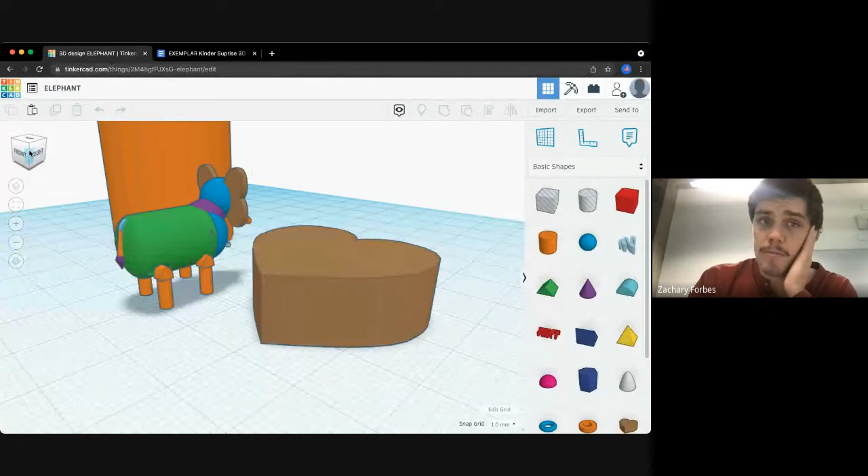Okay, so to get into Tinkercad, I think you guys should be able to get there pretty easily. So what I'm going to do today is start looking at how I might design something like this. This is super basic—well, actually maybe not so much, but everything in here is made from shapes I've found under basic shapes. So pretty much your imagination is your limit.

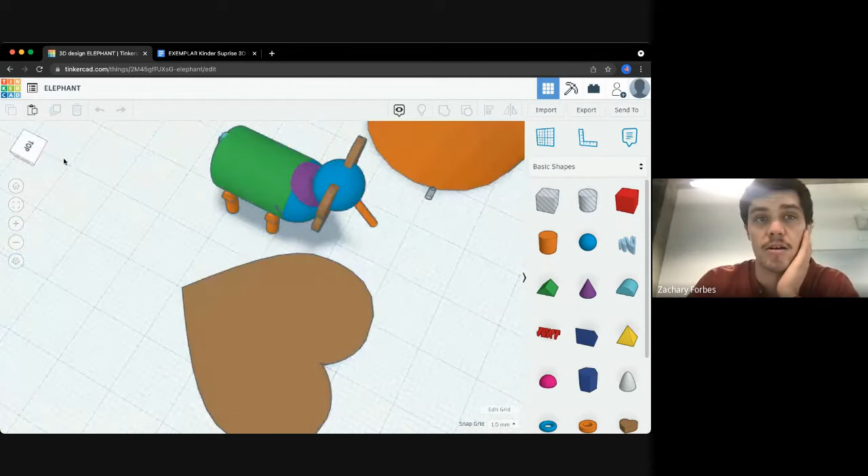This is the sort of idea I'm heading towards today. I'm trying to make a little elephant that has detachable parts that you can 3D print, so they can detach and reattach. Then you've got like a little Kinder Surprise toy that you can build and mess around with, make it do funny little things.

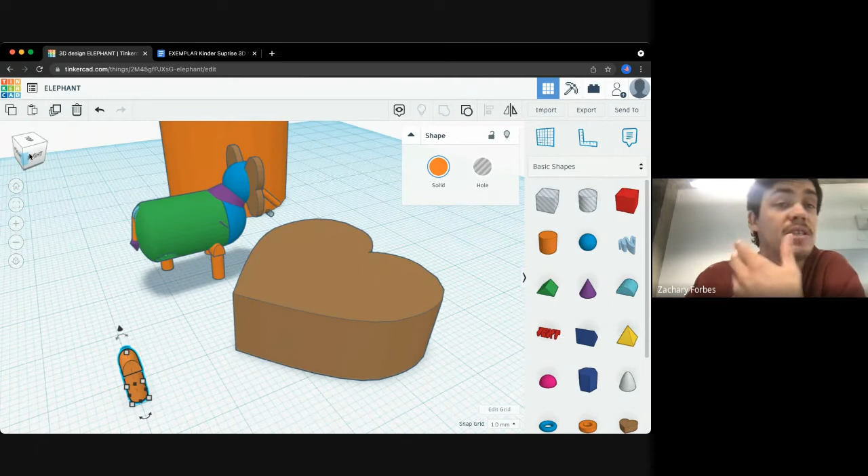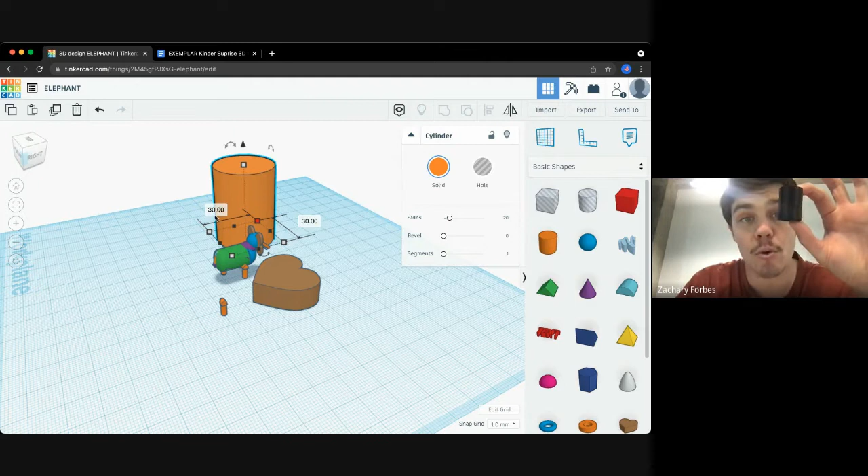Now, the reason I'm ditching this design is because I've got a cylinder here—this cylinder is the Kinder Surprise capsule model. Remember, we're trying to make a Kinder Surprise capsule, modeled by this cylinder, which has a diameter of 3 centimeters. Remember, Tinkercad is in millimeters, so that's 30 millimeters, and it is 4 centimeters tall, or 40 millimeters. So my elephant's actually too small for my capsule.

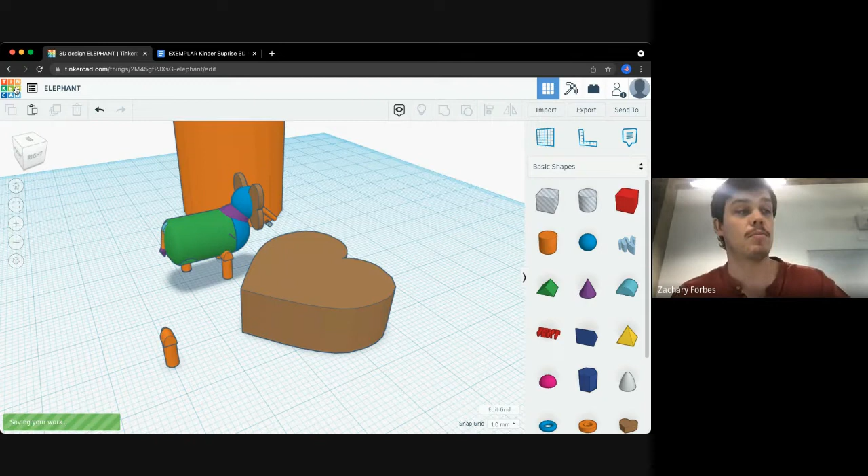So I'm going to make a bigger one now. I'm going to show you guys right from the start, and show you what I want you to do in the process. Remember, it's the process that's the most important part. Outcome's obviously fun for you guys to show your creativity, and that's really what I want you to do—show your creativity, but we're going to mix in a little bit of measurement within that.

Okay, so I'm going to go create a new design. If you guys have 2 screens, it might be worth having this open on one screen and Tinkercad open on the other so you can actually start having a try at doing some of these things. So I'm just going to build up some basic parts of my elephant.

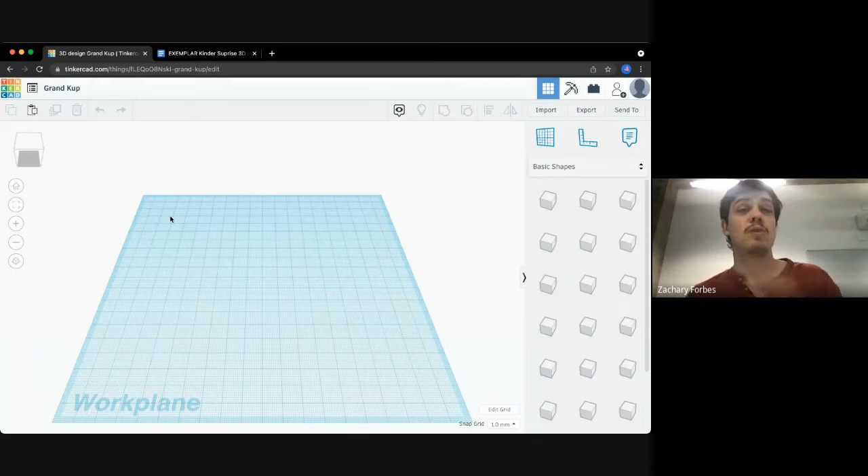What I'm going to do first is drag a cylinder on, and make that the Kinder Surprise size. So all you do is click here, and I can change the measurements by clicking here and typing in 30 millimeters. I want it to be 30 millimeters that way. To be a perfect circle, it has to be 30 millimeters both ways.

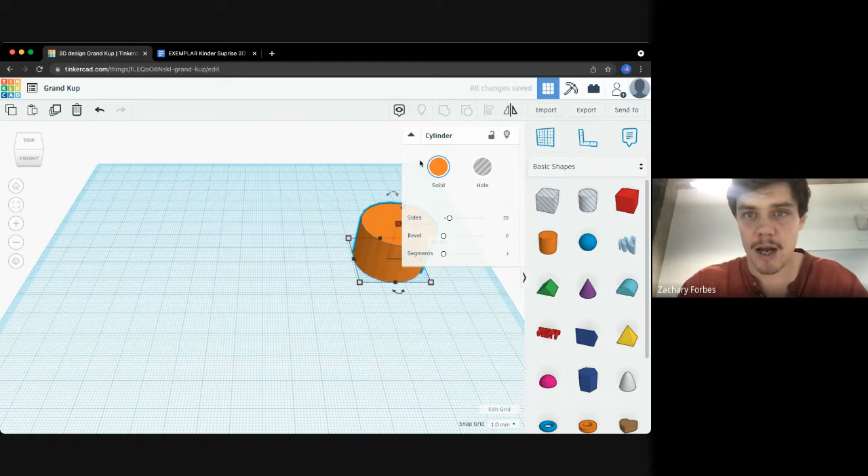I'm then going to change the height. If this is in the way, I'll just click this up arrow, and I want it to be 40 millimeters tall. I can also drag up from here to make that 40 millimeters tall.

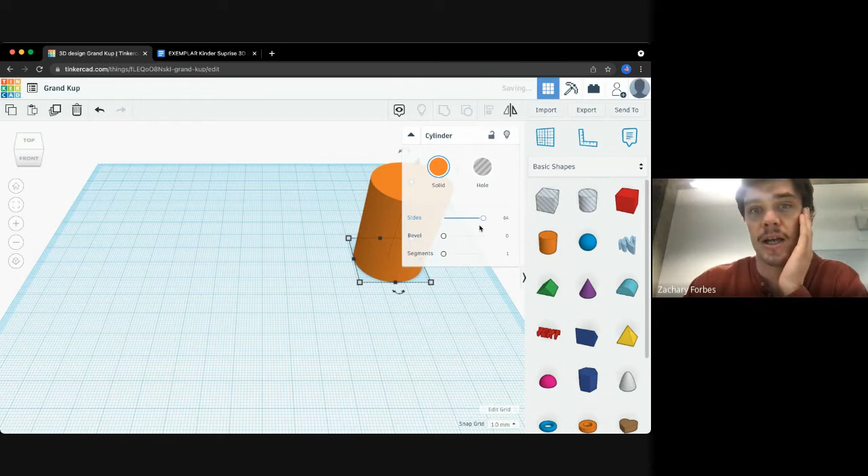See how this cylinder has lots of sides—you can actually make it have more sides in here, so you can make it closer to being a perfect cylinder by increasing that. See how now it's just a little bit cleaner. It's up to you guys.

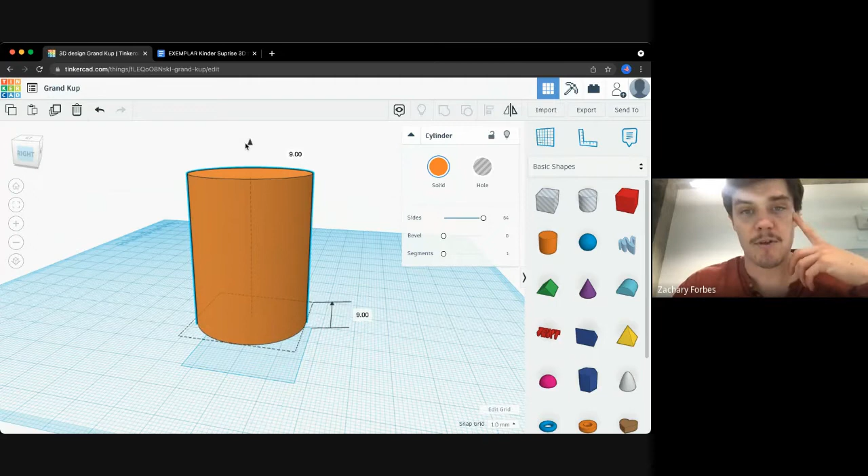So this is what I want my model to fit inside. If you want to rotate something, I'm going to show you—see how there's a few different things. I'm going to show you a few of the commands just on the cylinder. In here, if you want to lift something, it can all be lifted via this arrow. Now there are keyboard shortcuts, but I'll let you find them on your own. Notice that it's been lifted by 9 millimeters. I'm going to put it back down to 0 because I want it touching the ground, or the platform, should I say.

So that there makes it go up and down. These ones, we've already seen, affect the height; this is the length and width—so it's all measurement that we're working with. This here is rotation. I want to rotate it so it's a sideways capsule so I can fit something. I could actually just type in 90 here, or drag it around with these arrows until I get to 90. Right, so now my Kinder Surprise capsule's there.

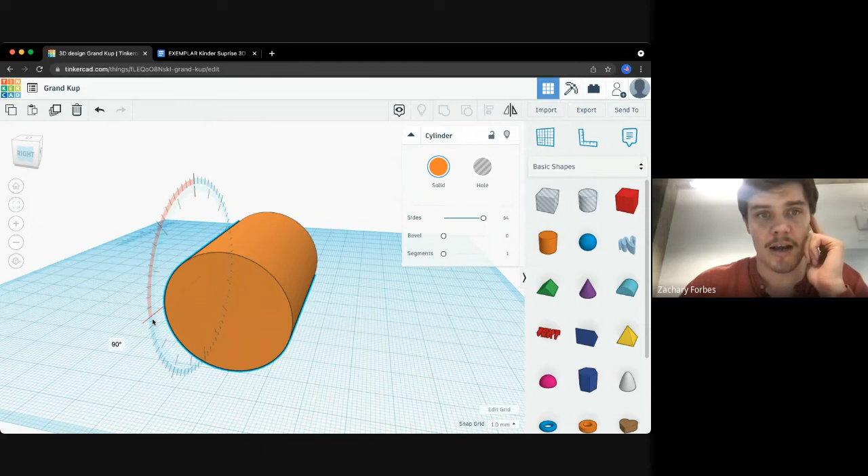So I'm going to use that to get an idea of how big my elephant is. The thing you're working on should be in the center—I don't want it on the bottom. So see, I'm using this little cube in the top left corner.

Okay, I'm just going to check that you guys are all hearing that, all good. Are you guys able to follow along? I think it looks fairly clear, and I'm talking. No one's made any comments.

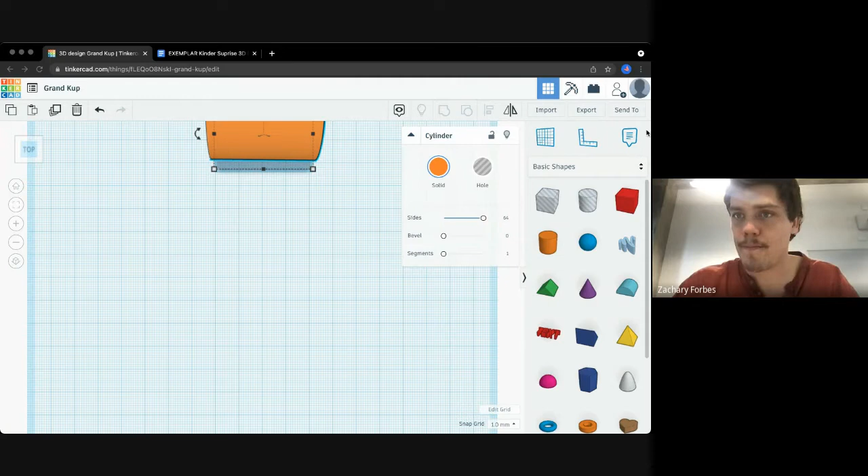Sweet as, okay. So I would put the capsule to the side and build your object in the middle of the work plane, because then you'll get to see better angles of it. So let's start developing my elephant.

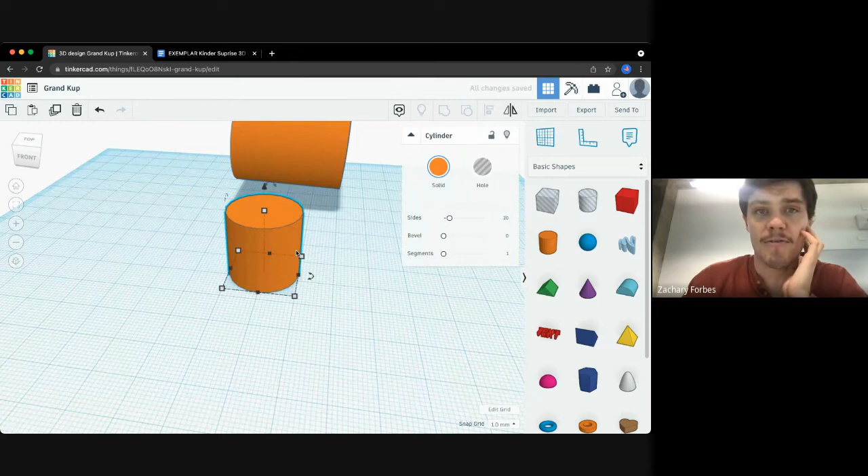So I think an elephant is what we're going to go for today. The center of my elephant's a cylinder as well. Now I want to sort of start thinking about my elephant. It needs to fit inside that capsule there, so I might make its body a bit smaller. I might go to like 1.5 centimeters.

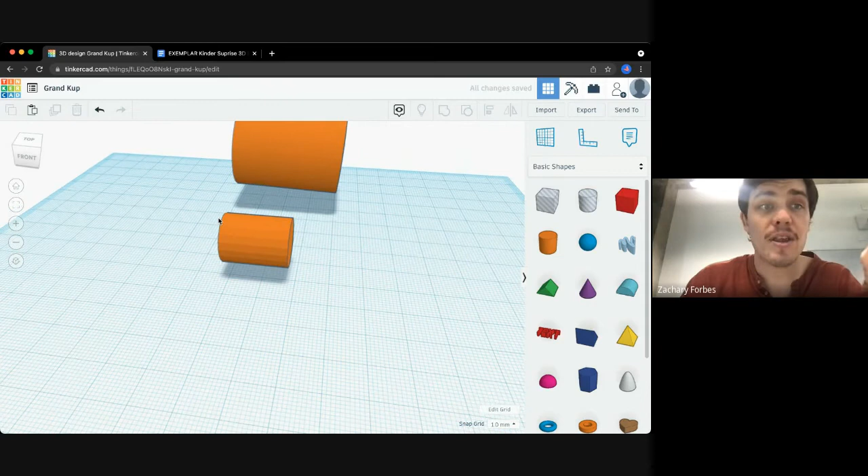And then how long do I want my elephant to be? Is that going to be good for my elephant? I mean, it looks all right. I'll bring it over to 90. So I've got to think about all the time, is my final thing going to fit inside the big cylinder? And I think that that's probably a good size of the body for my elephant.

Now, this is the beginning shape, right? So what you do is you get the ruler tool up here and you put it on your cylinder, and it gives you the measurements. So see how it says that it's 1.5 or 15 millimeters, and 20 millimeters tall.

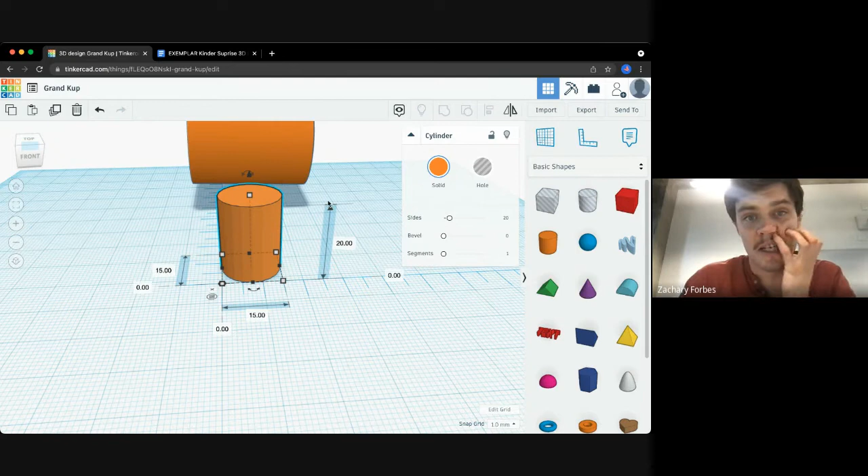I want you guys to snip that with the measurements like that. See how I'm capturing the 20, the 15, and the 15? I want you to capture that and put it into your document as you go, right? Because then you can work out the volumes later on.

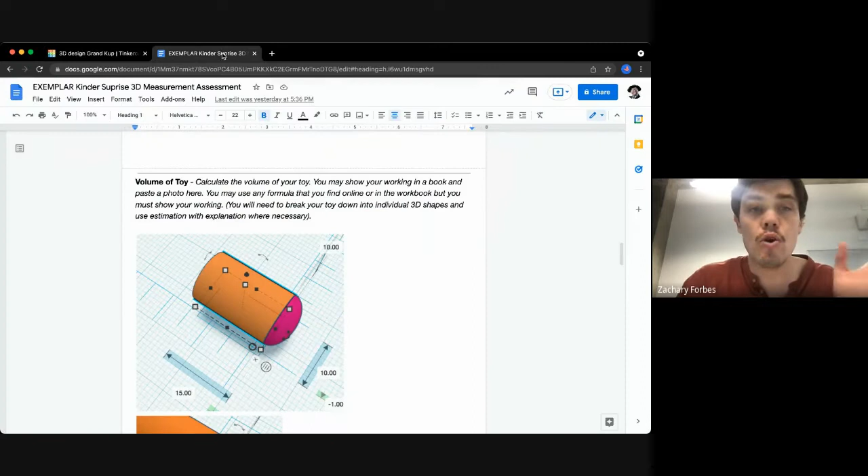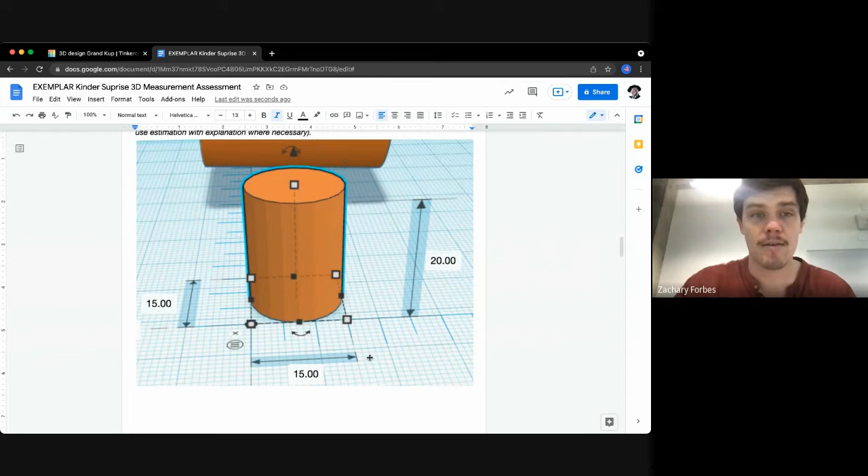So under volume of toy, just start snipping things into here, because you're getting marks based on finding the volume of these things. So if you want to get merit, you're going to need to find the volume of a few different shapes that are inside of your shape. So that's how I'm going to give you a merit mark. So if you work out the volume of this cylinder, you could do the working out underneath there, or you could just keep doing this and doing things as you go.

So what I'm going to do is I'm actually going to add something on. I want my elephant to have... I need a bottom for my elephant. So I don't need a sphere for that, maybe I'll use this. So this is a semi-sphere, but when I drag this down here, it's actually going to be not quite a semi-sphere anymore.

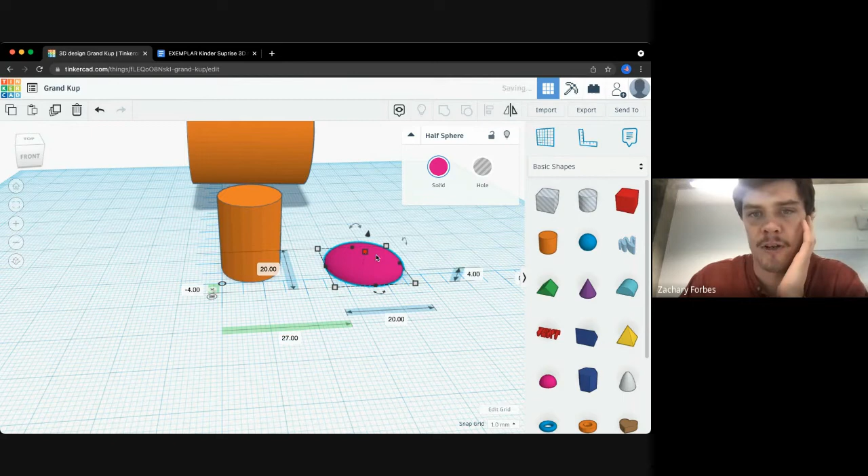So I'm going to make it the same as this one. So this one here is 15, 15. I don't want that ruler anymore, it's annoying me. So I need to make this one 15 and 15 as well. 15, 14, 15, 15, perfect.

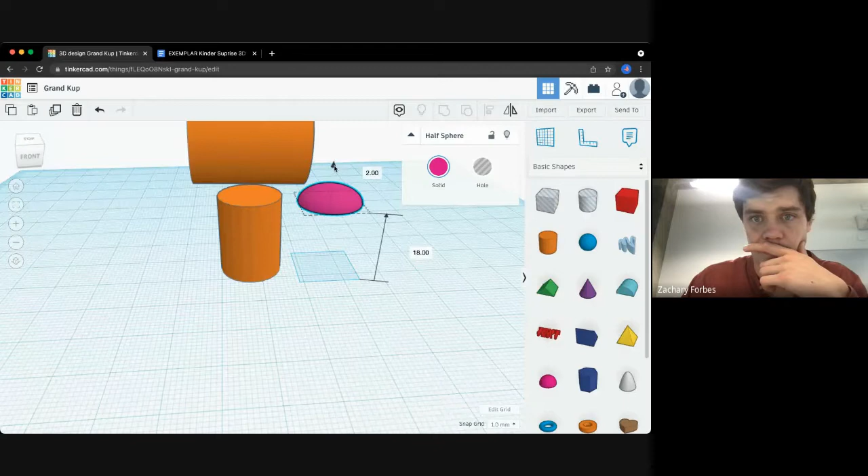So now I'm going to get this and I'm going to pull it up so it's at the same height. So I remember that that cylinder was how tall? It's 20 tall, so I need this to be 20 off the ground. See how that little line on the side says it's 20 off the ground? So now I can add that on top of my cylinder.

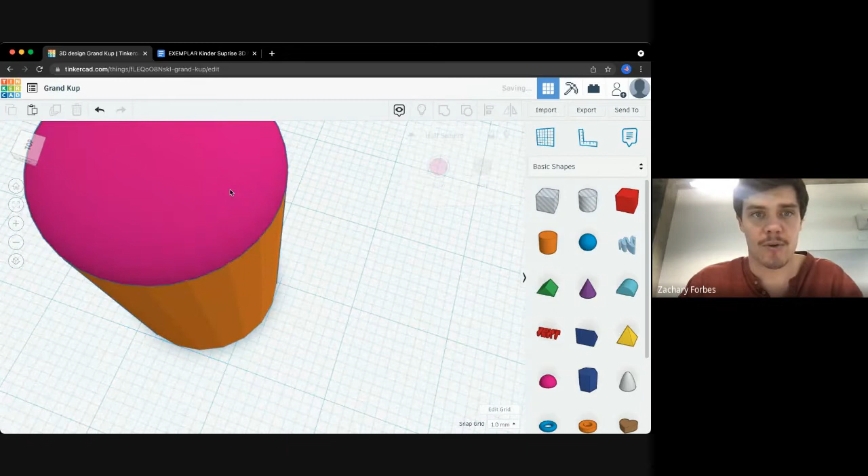And what you want to do is you want to check that it sort of fits right. Is everything fit together? So this is how you make a composite shape, right? So I'm now going to, I might actually duplicate that first so I can do a measurement thing on the side. So I just did that with Command D, or up on the side there is a duplicate option, right? I'm going to have that over there. I'm going to bring that one back down to the ground.

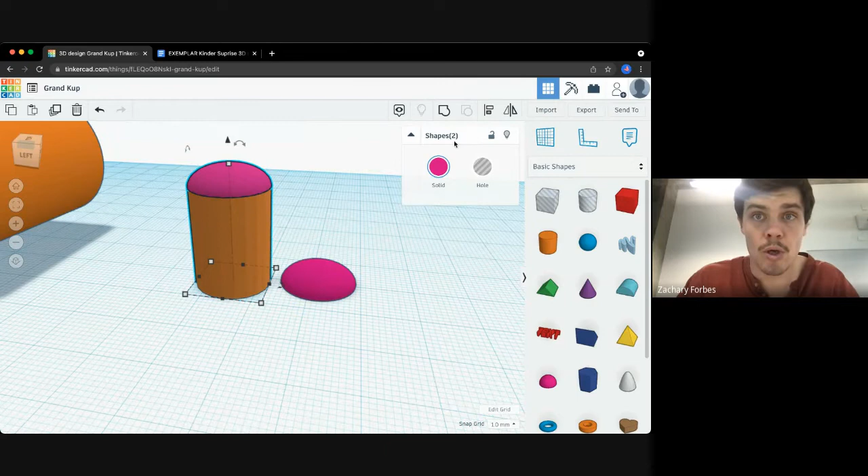Zero, perfect. Now, what I want to do here is I want to make this part of that cylinder. So I'm going to hold down Shift, and I'm going to click on both of them, so I'm selecting two things. So now it says Shapes 2. And once I have that, I can do Command G, or I can click Group over here, and it's going to make it one object, right?

So this is setting yourself up for 3D printing later on. It's taking a little while. But now that is a single object. So that's going to be my elephant's body and its bum, right?

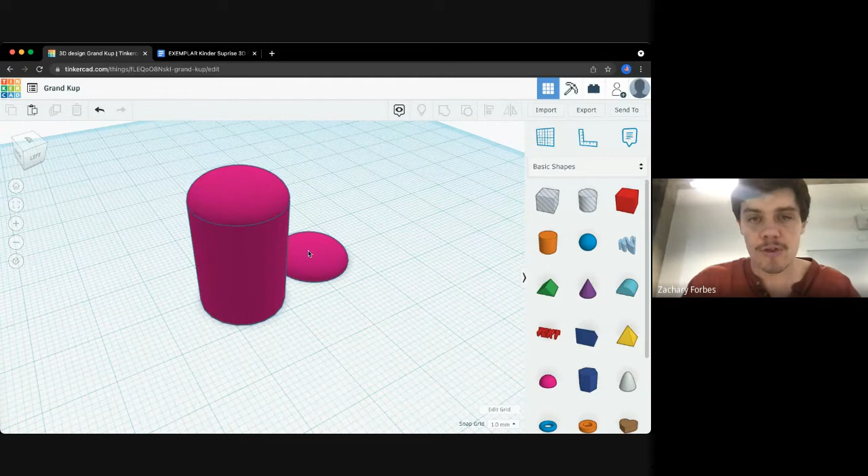So I also need to make sure to get this. This here is actually really hard to find a volume of, but I'm going to get it anyway, and I'll just get some measurements on it again. So remember, you just put your ruler down, put it on the corner, that gives you your measurements. Make sure they're all in the shot.

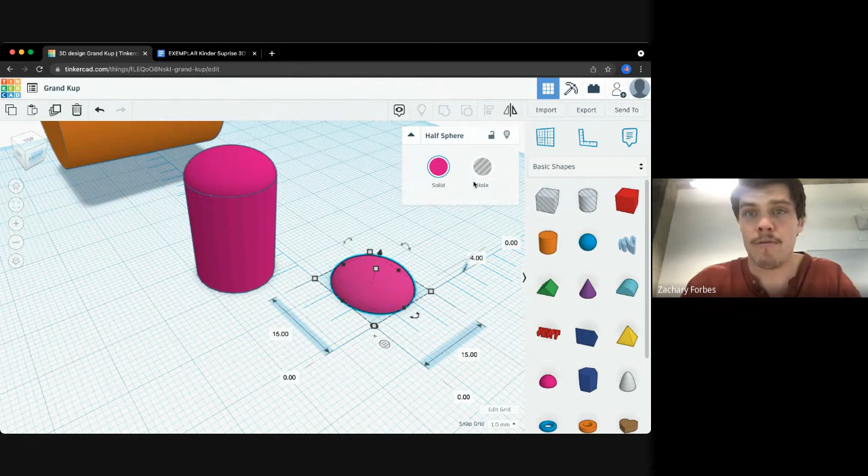Snip it. So if you do it piece by piece, you're pretty much guaranteed, like this will set you up really well for merit and excellence, right? So then I've got that shape in, and now I've also got this shape included inside my design.

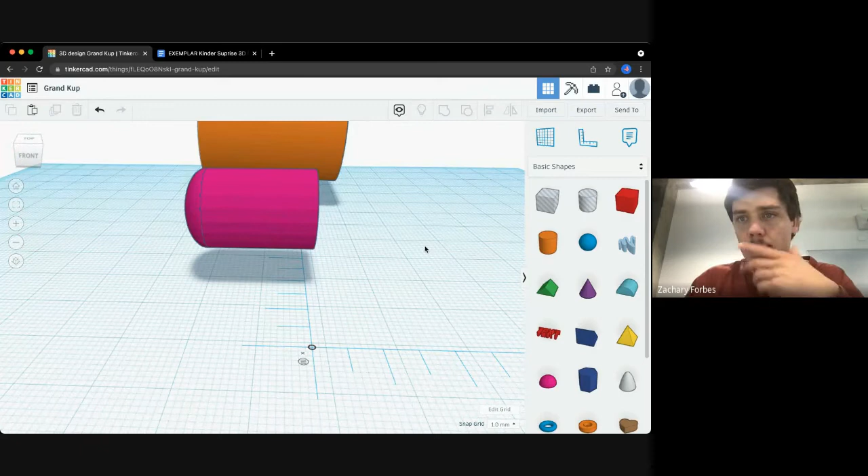So I can delete this. Now I want to rotate this to get it set up to be my elephant's body. Okay, so that's my elephant body. I'm going to put some legs here later, but what I want to do is actually get a nice little front going on here.

So I'm going to get a sphere. Spheres are actually really easy to work out the volume of. And I want my sphere to be the same height as this. So this thing here is how tall? 15 millimeters tall. So if I just make my sphere 15 in every length, I'll go 15 that way, 15 that way, and then where's the height?

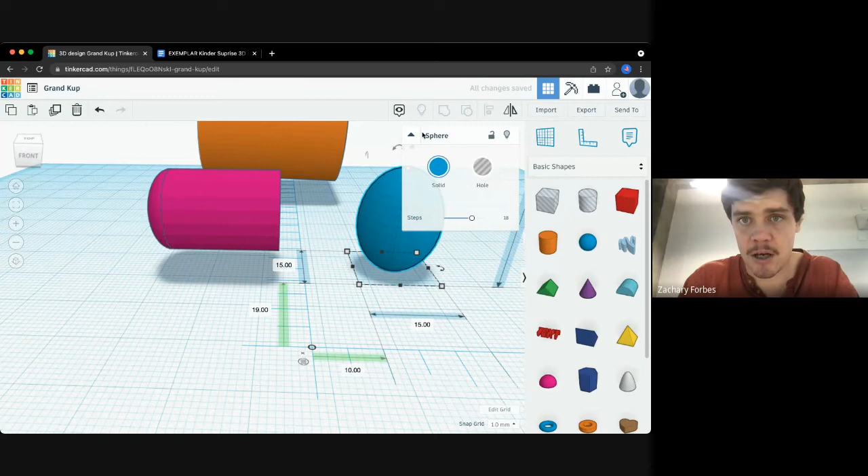I tap here, oh yeah, it's over there. Notice how when you have something in the center, it's way easier to work with it. So I'm going to go 15 as well. So now I've got a 15 millimeter diameter sphere.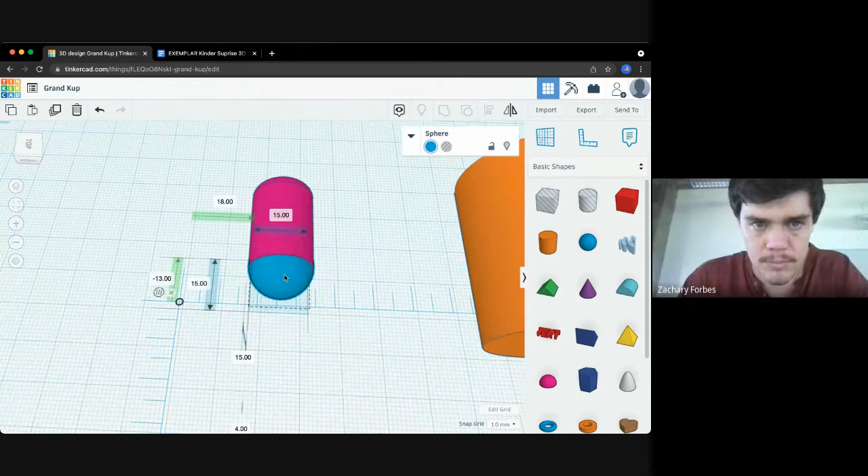What I want to do is drag that up until it sits nicely on my elephant body. See how that's not quite there yet. Oh yeah, is that looking pretty good? Is that the right fit? Oh no, it's too low. So I need to lift it a bit.

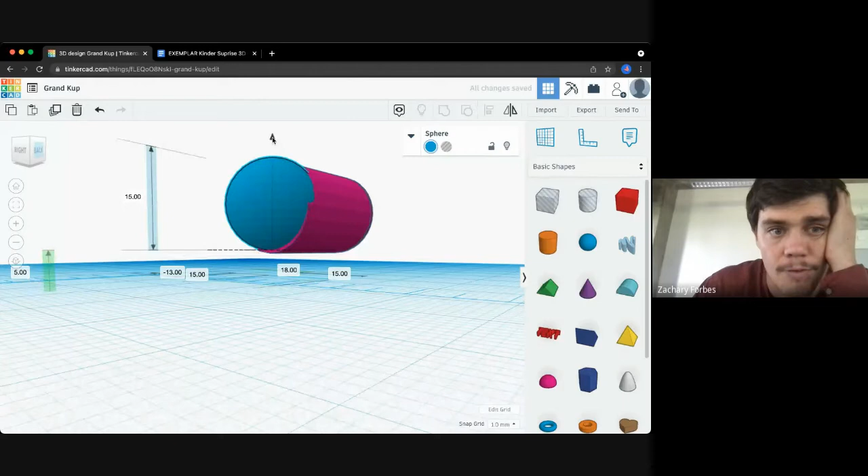So I might zoom in a bit so I can get a better idea of what's happening here. I want my sphere to perfectly fit on this, so I need to use the black arrow, drag it up one. Ooh, okay, this is a troubleshooting thing that's really hard to fix, so I'm going to show you how to do this now. See how being that high off the ground doesn't quite work, and being that high off the ground doesn't quite work either.

So 4 over on the left, you can see there's a little 4 and then it becomes a 5. I need to change this number to halfway, so 4 is too low and 5 is too high. I need something in the middle, so between 4 and 5 is 4.5. I'm going to type that in here, and see how now my sphere is well fitted inside. So that's where I want it.

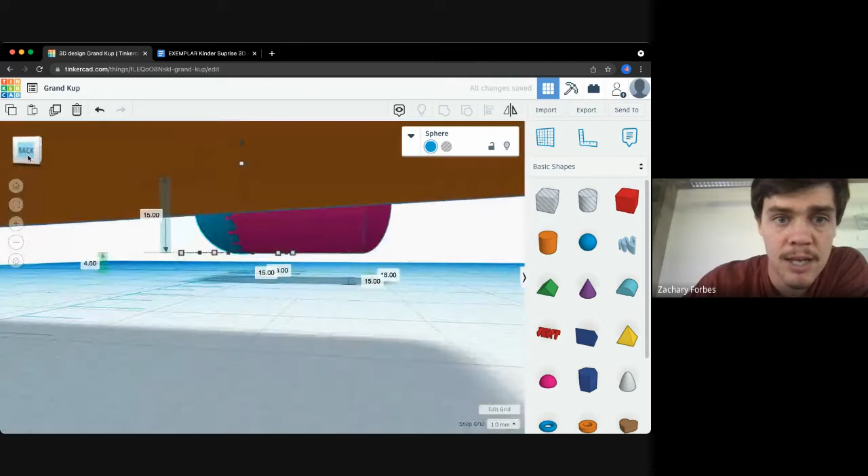I wanted half a sphere for the front of my elephant, and I'm going to duplicate that with Command D so I can get a measurement of it over here. So there's 2 of them. I'm just going to get my measurements.

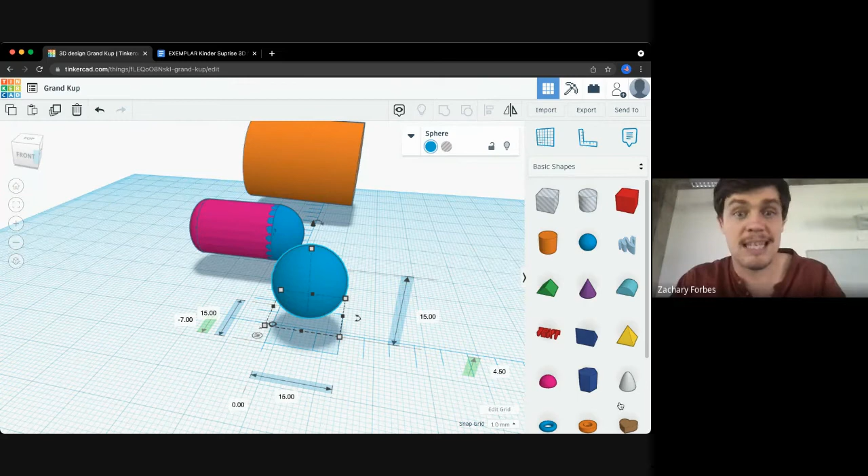Remember, we're trying to take measurements as we go because doing it at the end is going to be too hard. If you're going for just achieved, you don't really need to take a measurement of like 1 or 2 things, you'll be fine. But if you're going for merit, you're going to need to have a measurement of a few things and join them together. So now I'm going to copy that, and remember, I'm just chucking them in as I go, and then I'll do all of the maths later on.

Right now, I'm focused on the design of my toy. We'll work out the volume later on. Okay, so now what I'm going to do is join them together, and all we're doing is building up to a Kinder Surprise toy. I'm going to get rid of that ruler, the little X on the ground. So this is my elephant's body so far.

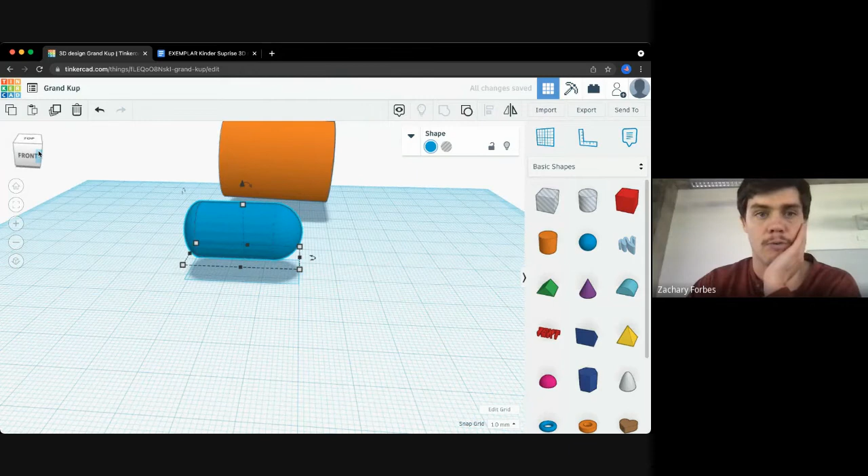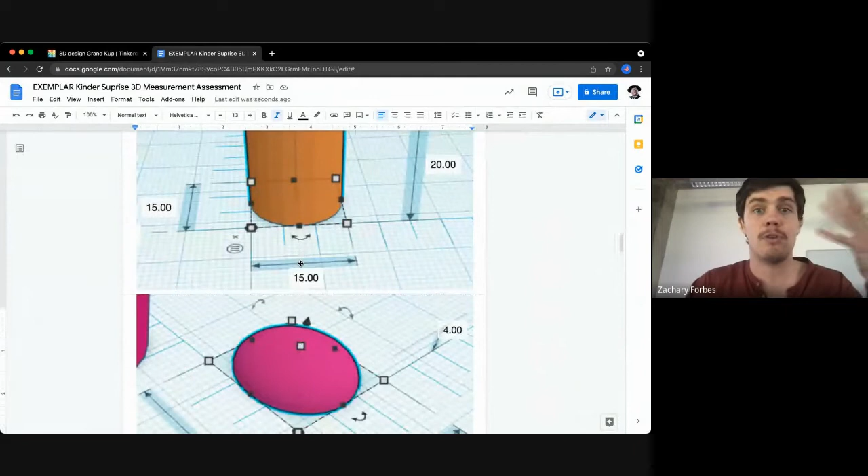Now I'm going to stop there. To be honest, if you made this shape and did some volume measurements, this is enough for merit. But it's kind of not really something cool yet, right? If you were able to work out the volume of these things, honestly I would give you a merit because you're showing volume of a cylinder. You're going to have to do some weird estimation for this half sphere that's been squished down, that's going to be really hard to work out, and you're going to have to find the volume of a sphere.

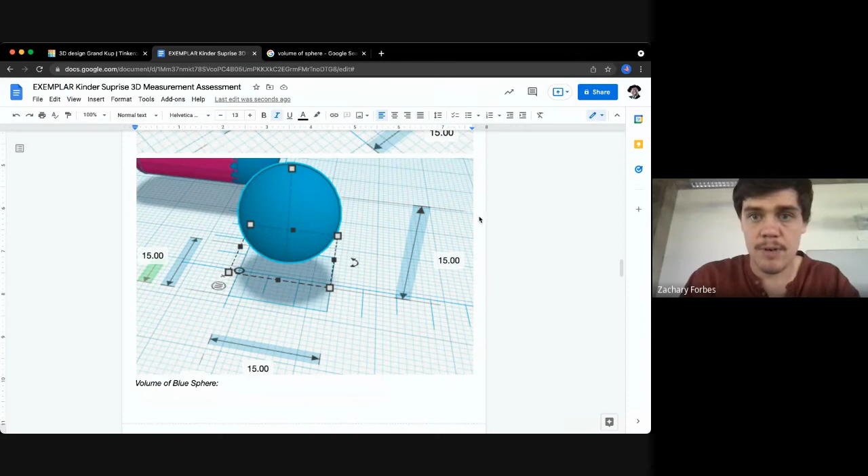So what you could do is start prepping. I can say volume of blue sphere just below this picture, and then honestly just go to the internet, type in volume of sphere, and that will give you a formula. Look at this, this is a formula for a volume of a sphere. So I grab this, snip it. Perfect, I don't even really need to do much, I'm going to whack it in there. Volume equals 4 over 3 pi r cubed.

So r is radius. Let's just quickly work this out. So volume of blue sphere. Yeah, what am I going to do? I want to make this sort of to the side. Yeah, you can go there. No.

Too big, okay, and then I'm going to work out the volume here. So volume, blue sphere. You can do this on paper by the way, equals, so it's going to be 4. If you're doing it on this, you can either do working in your book and take a photo, or you can actually use the equation tool and fully type in all of your equations using this. See how I've got a fraction here, so I can go 4 over 3. Oopsies, I'm going to zoom in a little bit so you guys can see what I'm actually doing. I hope you guys can see this, by the way. I'm assuming you can.

4 over 3, and then pi across pi. So you can insert symbols from here as well. There should be a pi in here somewhere, pi. And then what is our radius?

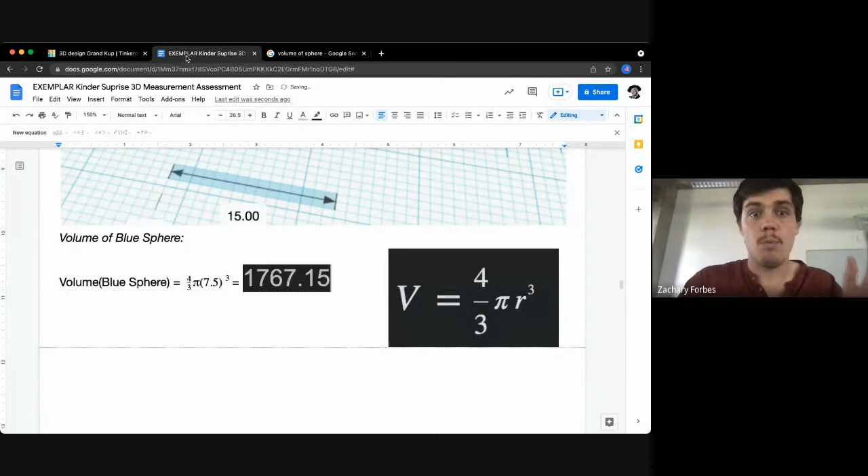What we need you to do is Control Shift V, by the way, guys. Control Shift V. Then we know you're not cheating. So look, I know what I'm working out. I've got a picture of what I'm working out. And I've got my calculation and I've got my answer.

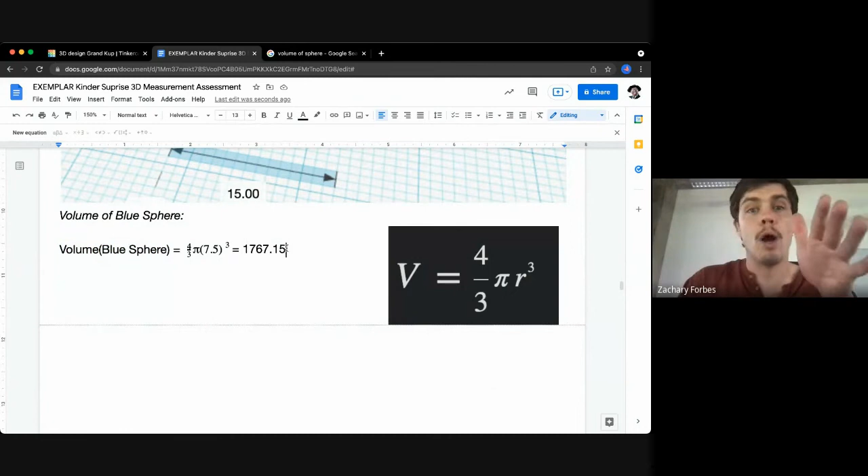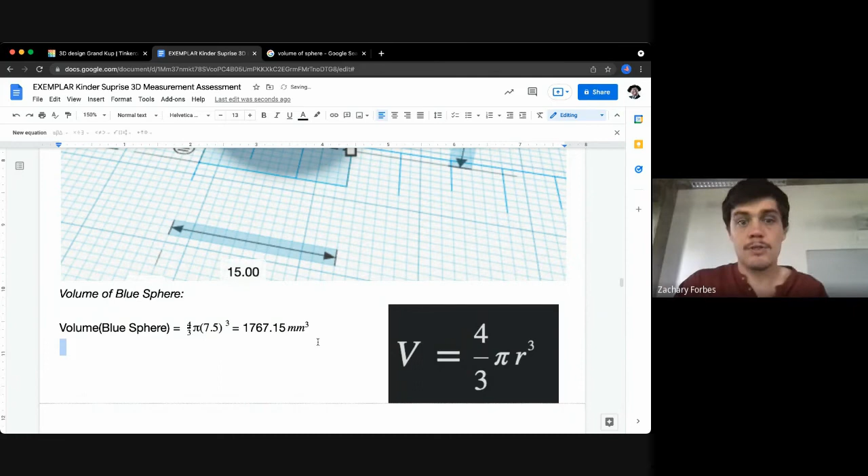Oh, I need units. This sphere is in millimeters. Everything in Tinkercad is in millimeters. So you just go mm, and if it's volume, it's to the power of 3. So that would be fine. Oopsies. Maybe this looks better.

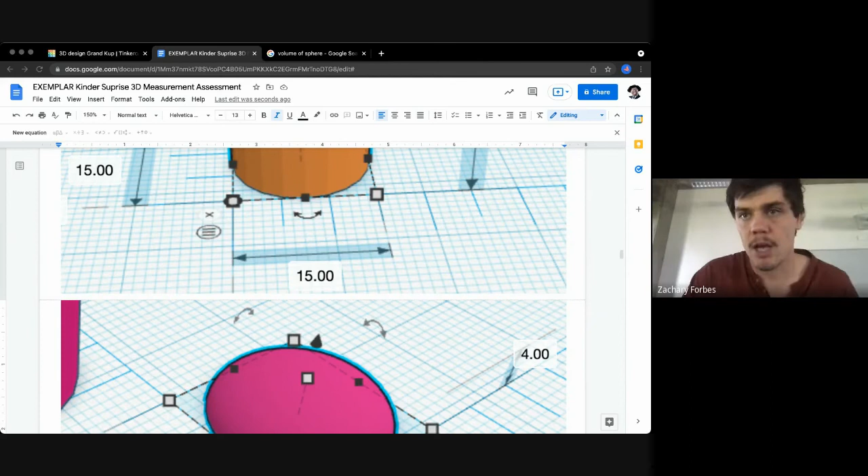Yeah, so that would be the volume of something in your assignment. And if you join together like 3 different things, if you worked out this volume and that volume, added them together, that is enough for your merit level. Probably excellence, I want to see a good design, and I want you to look into it a little bit deeper. But if you're going for merit, that's enough.

So I'm going to show you just another couple of examples. I don't want to waste too much of your time. We'll do 1 more minute, and then you guys are free to go. I'm just going to show you a car I worked on with a few tricks. Actually, I should have shown you that trick on there, but nah.

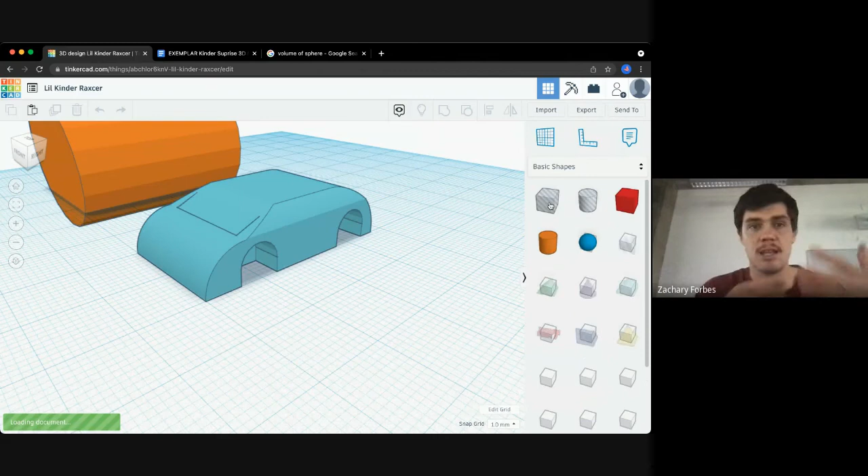So I've done that elephant there. This is what the elephant's going to eventually look like. I'll keep working on that and give you an exemplar with it. But so this is a little car that I was working on as well. Maybe you want to do a car and you could have wheels that are separately 3D printed, or maybe have your own wheels at home you're going to use on your design, and you'll just print the model of the car and stick the wheels into a hole or something.

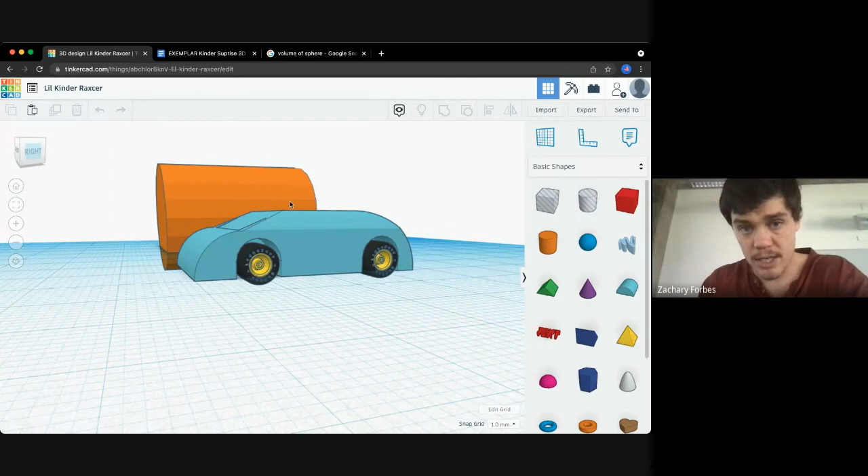But this is the little car design I was working on. You can do all of this with basic shapes. I know this is a super basic car, but you can do a lot by making holes and using... So this is just a quarter of a cylinder. There's just a block inside here. And then I've just used a cylinder. I made a cylinder hole out of a cube, and then I used the cube hole to join things together.

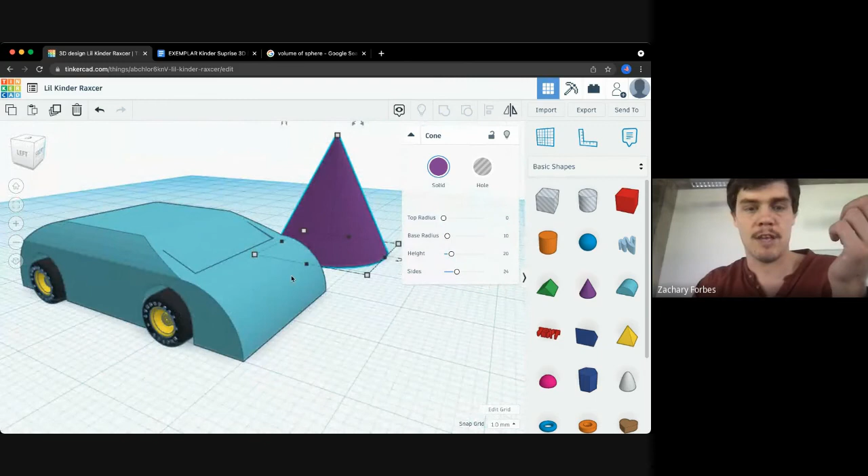So I'm going to show you guys how holes work. Say I wanted a... what are they called? Frustum. So say I wanted just the bottom of my cone over here. So let me get a good angle so I can show you what I mean. So say I had this cone, but I only wanted the bottom half of it.

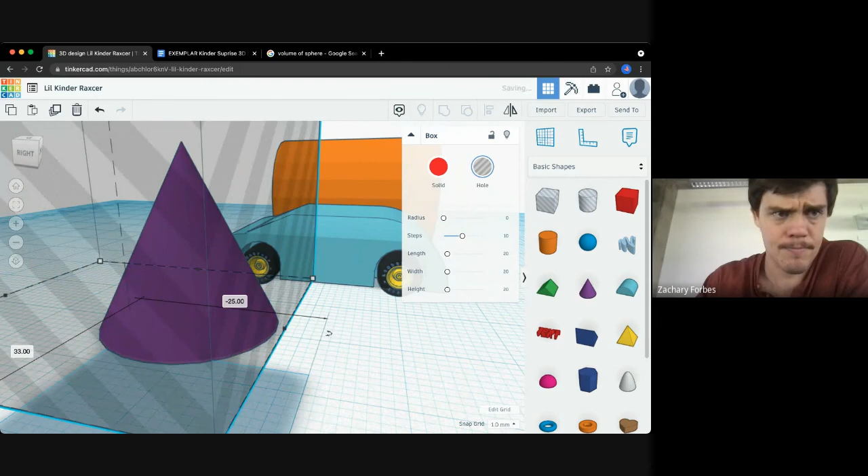So to do that, you just make a hole. So you get a hole in here. See how that's like see-through. You move that up, move it on top of your thing that you're trying to cut out. Let's see that I got that covered. No, remember to look at a couple of angles. So see how now I've got that.

And then you just join those 2 things together and then add them. So group them. So now I just have the base of a cone. So you can do a lot of extra creative stuff using that.

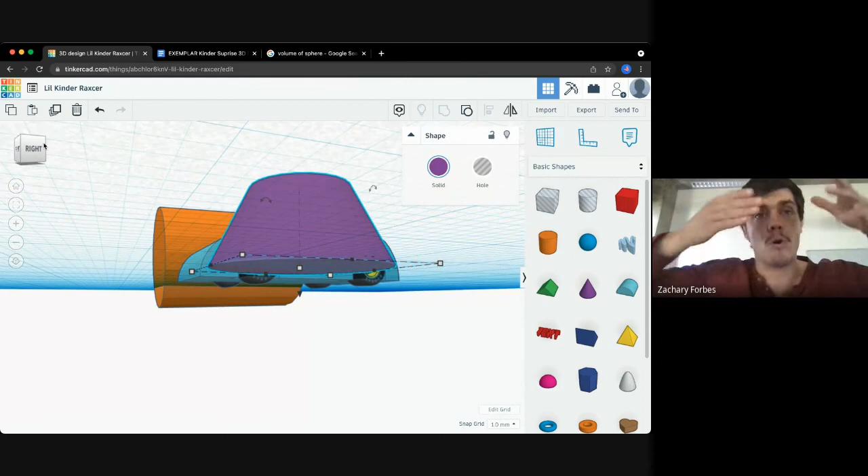But you're going to have to take a photo. You're going to have to take a screenshot of your original cone and then work out how much of the cone is missing for your merit level calculation.

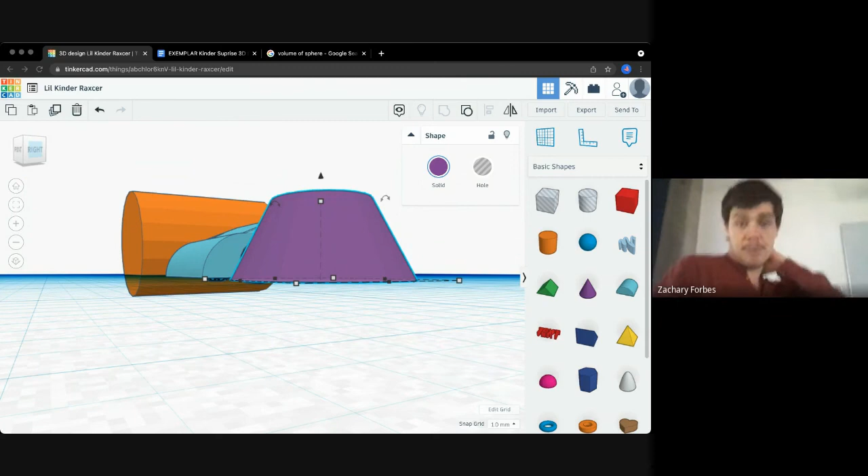I want you to design cool toys. But remember, take screenshots as you go, chuck them into the assessment, and then work out the volume. Later on, you can use the same technique that I was using. Are there any questions? I'm going to stop recording.